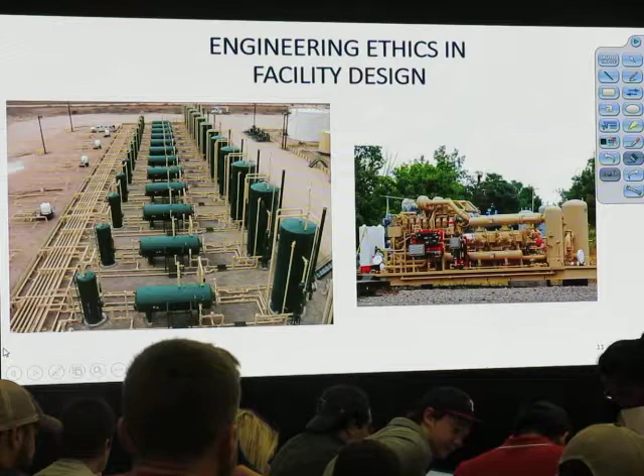This video will show here. We're going to talk about being a registered professional engineer. The film clip I'm going to show you is from 1937, and I hope the sound comes through.

Okay, so we had a glitch on the sound part. New London, Texas is located in Far East Texas. In 1937, a new school had been built. It had been in the East Texas oil field. They had a brand new building. The building exploded one Thursday afternoon. A few of the kids had got to go home earlier, but over 300 students and teachers and other people in that building were killed as a result of a natural gas explosion.

This film clip is a little grainy. Remember, it was shot in 1937. HD hadn't been invented yet. But it affected an entire community. It was as a result of this disaster that registered professional engineers were made - the ability to have registered professional engineers came into law by the Texas legislature.

So let me stop the video. Like I said, it's kind of grainy without the sound coming through there.

What they had done was the East Texas oil fields had just come into play. There was lots of natural gas. They built this new school building with the oil revenues. Things were really looking good. The school had been designed with a boiler system in place where you heat up water and then put hot water through the pipes. And the pipes were connected to radiant heaters in each of the classrooms.

Somebody decided on the school board that there was all that natural gas. Let's just use natural gas heaters. And we'll run a line from the oil fields, so they tapped a line - a company provided a line coming from the field separation, to run that gas into the school, and they put gas heaters in each classroom.

There was no engineering design on it. So the classrooms had this natural gas piping into every classroom. There were leaks in the building, but they weren't detected. Natural gas has no smell. When you say you smell gas, like in a municipal line, it's because mercaptans have been introduced into the line as a safety feature, so that you can smell that gas.

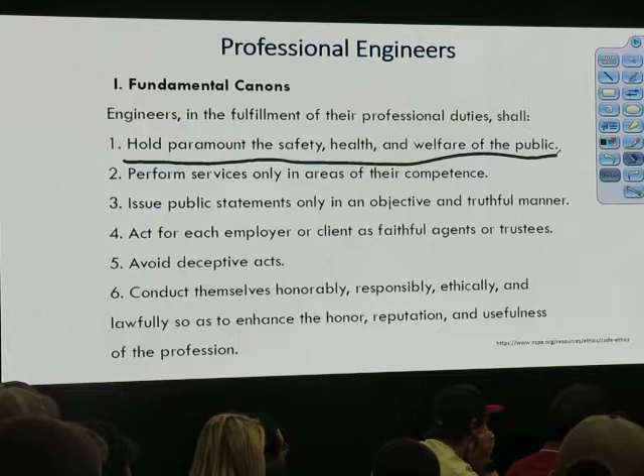And then these are in the rules of practice. Here's another one that's really key and important after safety, health, and welfare: engineers shall perform services only in their areas of competence. So you're trained as petroleum engineers, and especially when we talk about facilities design, there are lots of areas of that facility and things we'll build and talk about that we're not going to cover in petroleum engineering classes.

For example, electrical installation, structural requirements, civil works for roads and foundations—all of those are a separate discipline of engineering. If you want to take those, you take civil engineering, mechanical engineering. So there may be parts and pieces of that facility you're going to have to go somewhere else to get that technical skill, or have people with those technical skills perform those duties for you.

There are areas of competence that you will develop as you go through your career, and for certain things you'll have a good understanding, a good knowledge of that area, so it may not be necessary to bring in the mechanical engineer to verify that particular part if you feel you have that competence. But remember, by signing off on it, you're guaranteeing health and safety.

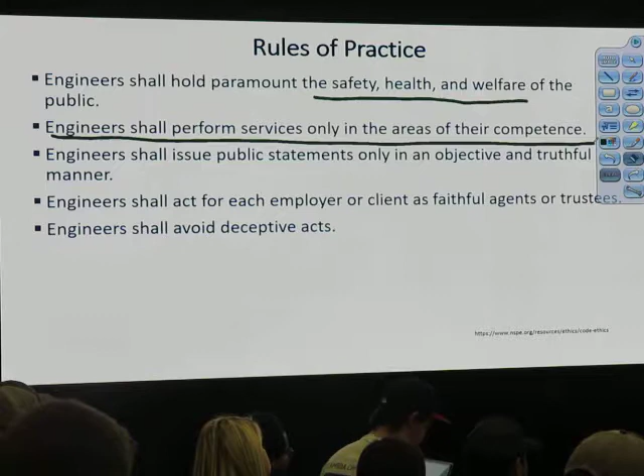These are the professional obligations. They look very similar to some of the codes and canons we've already talked about. But in summary, being an engineer, you have a responsibility to protect the safety and health of the public in the design and operation of a facility, whether you're licensed or not.

If you're licensed, that means you can represent yourself to the public, take on independent work, be a consultant, sign government documents, sign certified documents where necessary to be signed by a professional engineer. A lot of you will work in companies where that is not required—you work under what's called an industry exemption, where you're allowed to do the engineering work without being a professional engineer. The company takes that liability umbrella under its own venue, attesting that their engineers are doing this safely.

But if you're working for a company operating on BLM lands or state lands, where a state or federal government wants sign-off by a registered professional engineer, you have to be registered to do that.

So the public includes your coworkers and fellow employees, the people sitting with you here today, and some you haven't even met yet. Know what your limits are on your area of expertise when it comes to facility ethics. Questions?

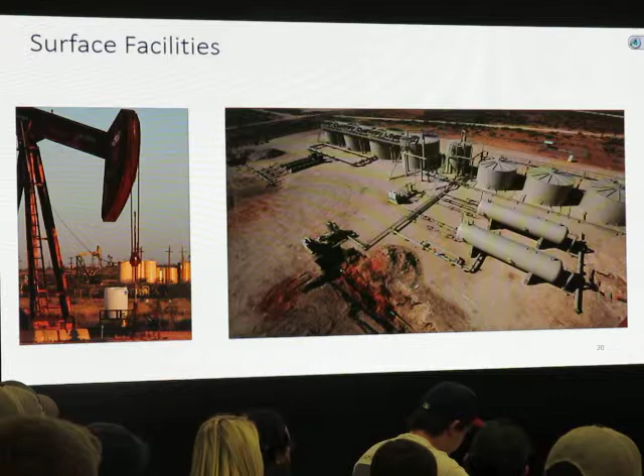Okay, I understand you went through some of these pretty quickly. On facilities, one thing I've noticed is that most of the time when we go through facilities, every one of them is sitting by a road. There's access to that by the public. So just because it's in the oil field, not everybody out there is an oil field worker.

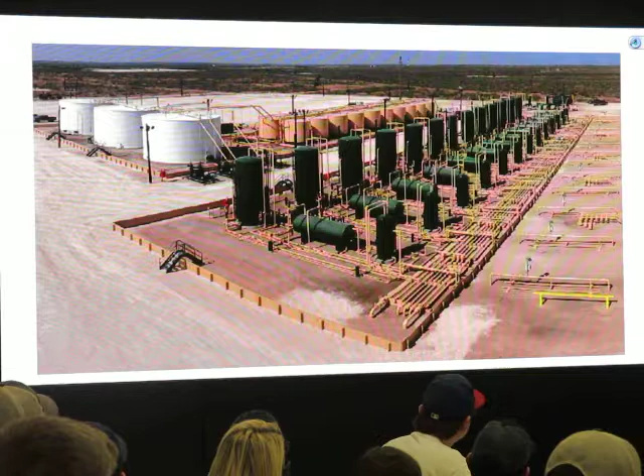There are hunters that will come out and be hunting. There are people who drive up and down the oil field roads for places to party, all those kinds of things. There are going to be lots of reasons that lots of people are out there—it could be a school bus dropping off kids for a tour. All of those things have to be designed with safety in mind.

We looked at some of those earlier slides with lots of batteries, lots of equipment, lots of facilities. A tank battery can be as simple as this. One thing that trips people up in senior design: you learn how to design all these vessels and think you have to use every one in your battery design. But a facility with a couple of oil tanks, a water tank, some separators, and a heater treater is all they needed at that particular battery to do the work. Don't over-engineer it. Don't put in more than you need. This was a simple battery, requiring very little equipment compared to some of the bigger ones we saw with lots of pictures.

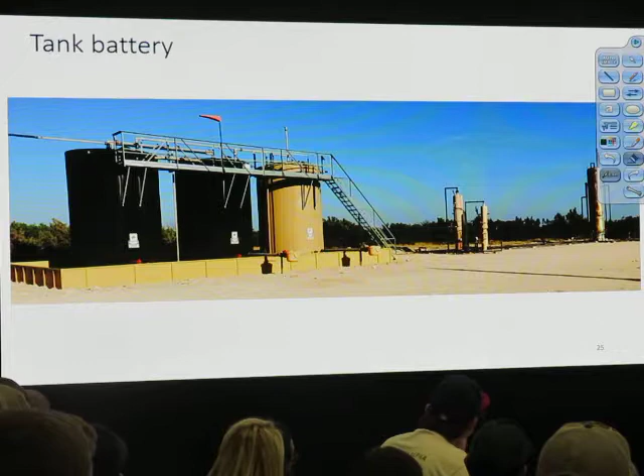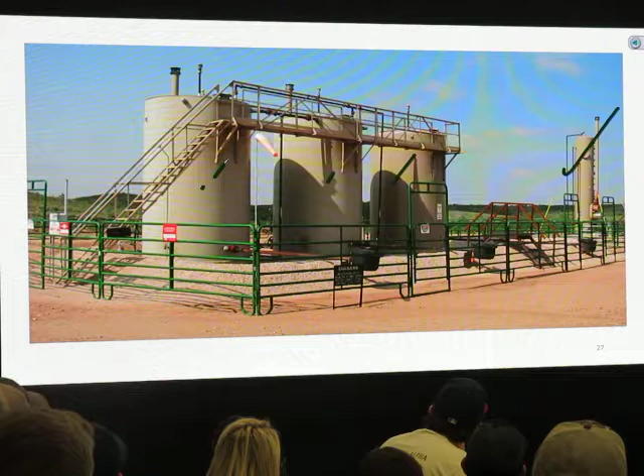Tanks. This is a tank battery. All it has is a heater treater and three tanks, probably two oil and one water. That can be a battery. It works as a facility.

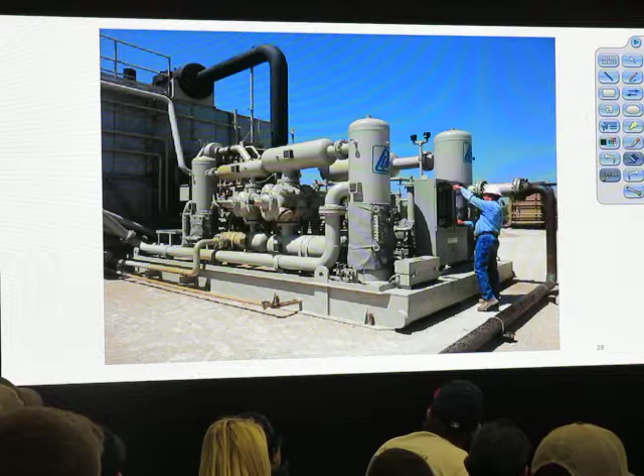Compression, we're going to talk about that. A lot of these things we will see live, or in work, or at OTC. We've added compressors that you guys haven't seen yet, some with internals and plexiglass plates over them so you can see those interior working parts.

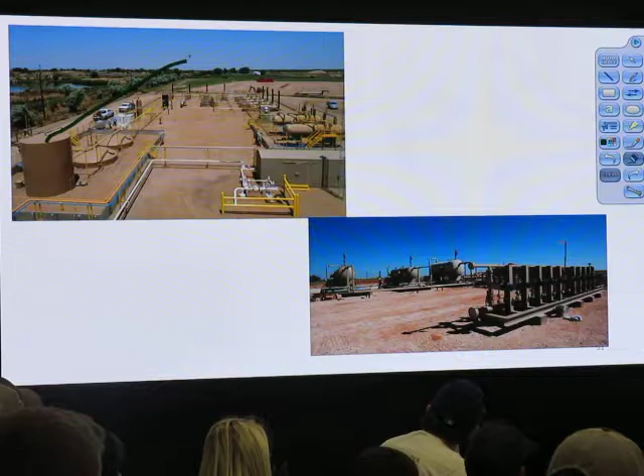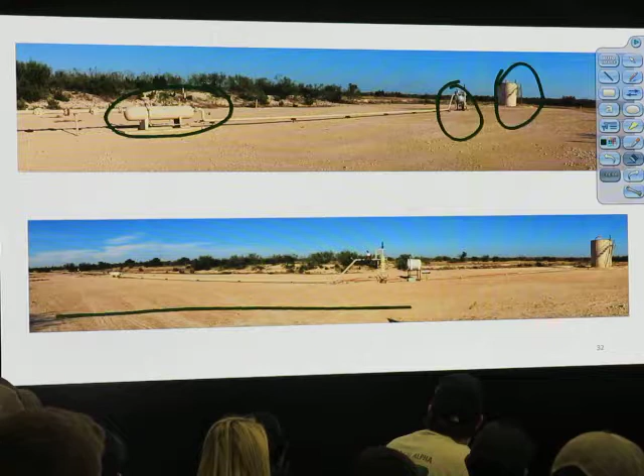This is a gas well, a high pressure gas well. It's got a wellhead here, a tank probably for water, and a separator. Here's another view going on down to a gas sales point—we're going to talk a lot about gas sales in a minute. Notice how simple that can be, and how far apart things are. It's probably at least 50 feet from this wellhead to that separator. There are minimum distances we need to space equipment for fire safety and explosion safety. What you'll see at OTC is condensed together because we're not putting anything hazardous through it, but in practice these things have to be safely spaced.

Either there will be a state or federal standard on that, or there will be a company policy on how far apart those vessels need to be. Sooner or later.

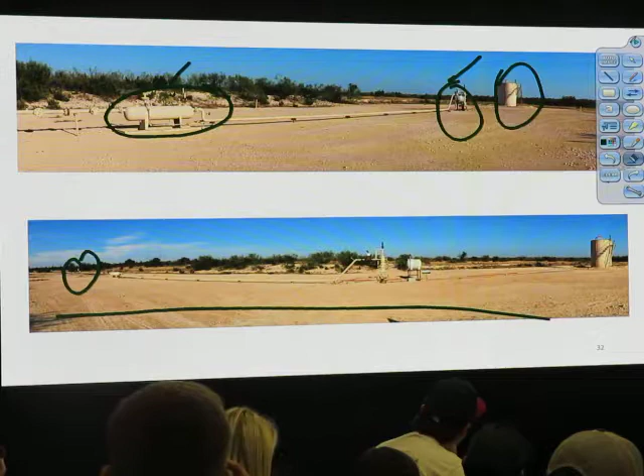Again, more samples of batteries. These are gas sales meters—this is where your cash register is for the sales of gas off any given lease or property. Notice there are two: one here, and another one here. Probably the gas company has a meter they use to collect volumes and sell the gas, and the company may have a check meter. You're the operator, you want to make sure they're not getting any mismeasurement, so you put your own meter in as a check meter to double check that volume, because this is what you're getting paid on.

The other important part to think about is the quality going through the sales line, and the pressure at these points on the battery. Wherever this goes into a sales line, there's a pressure behind it set by the gas processor or the gas pipeline company. That pressure is your starting point for your design through the battery, because everything we do—if the gas is flowing this way—has to be able to get into whatever that pressure is. That's our starting point, and we negotiate that as part of the contract. It may not be negotiable; there's only one gathering system in a given area. That pressure is set at that point, whether it's 50 psi or 1,000 psi.

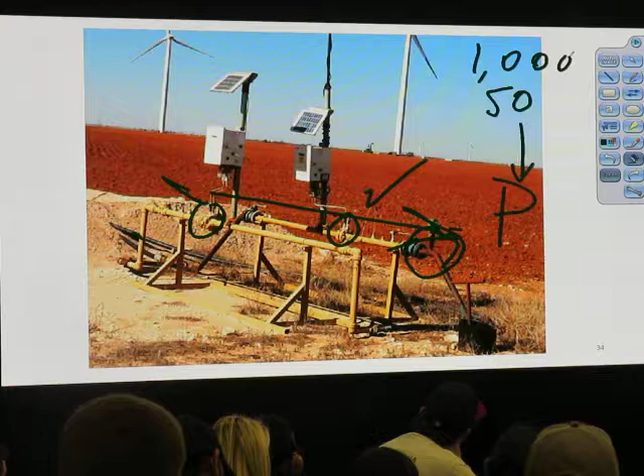That's going to be set in our contract, and everything we put in there has to be designed to meet that requirement. If we can't get into this line, we don't sell the gas. We don't sell the gas means we don't sell the oil, because we're shut in. So this is critical.

Again, a little review back maybe from what you covered earlier last week. Keep coming in here once a week, it's going to be a good deal. I won't know what you talked about.

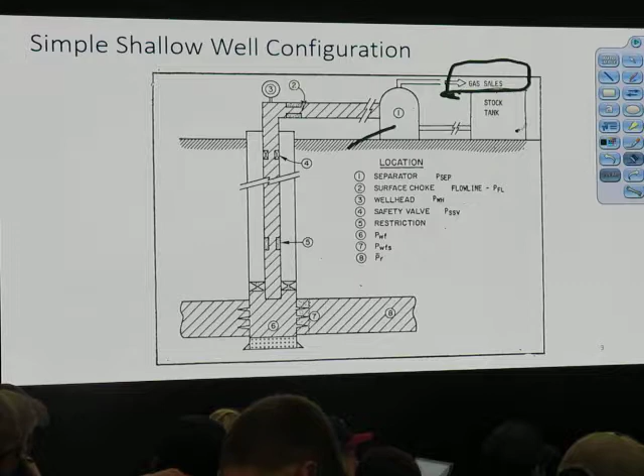Here's our gas sales coming through here, out in the simplest case through a separator and going to gas sales. That's the back pressure point—that's our sales point, that's our cash register. Just like off the oil tank, here's our oil sales. So this is where we're making our money, selling it here and selling it here. If the gas doesn't meet the minimum standards for quality or pressure, it doesn't move. Same with the oil.

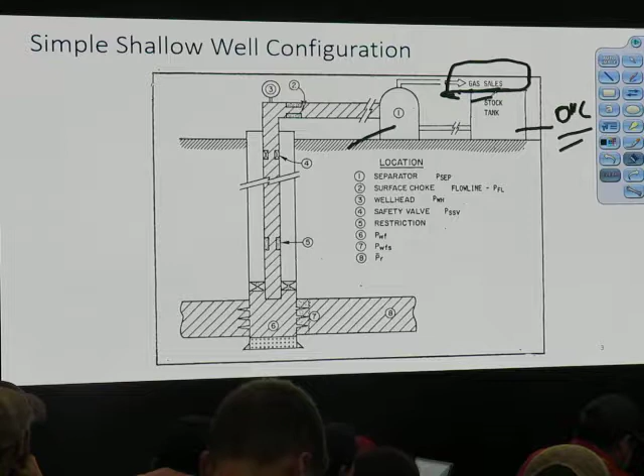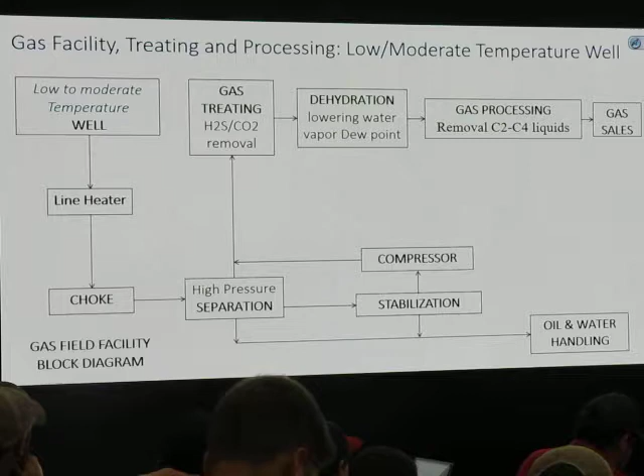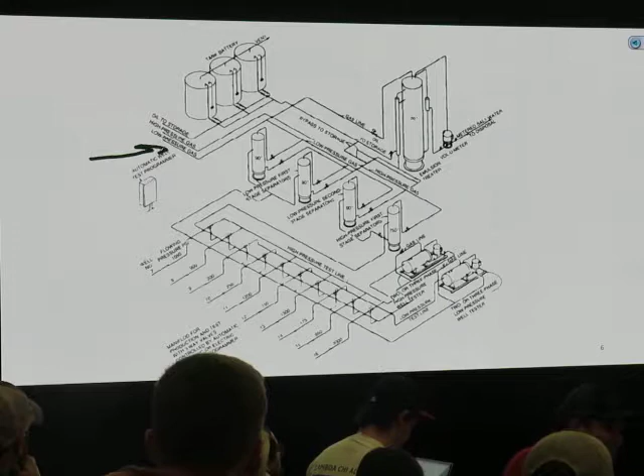You look a little bit at the flow streams for high temperature, low temperature wells. Some tank batteries will have a high-pressure gas system, and some will have a low-pressure system. This is not uncommon, especially on offshore platforms, also where you have a gas lift system where you're pressuring up some of the gas. If you look closer, it says low-pressure gas line, high-pressure gas line. The high-pressure gas line may be taken off going back for gas lift wells, or it may go for additional compression. The low-pressure gas is where we're selling it.

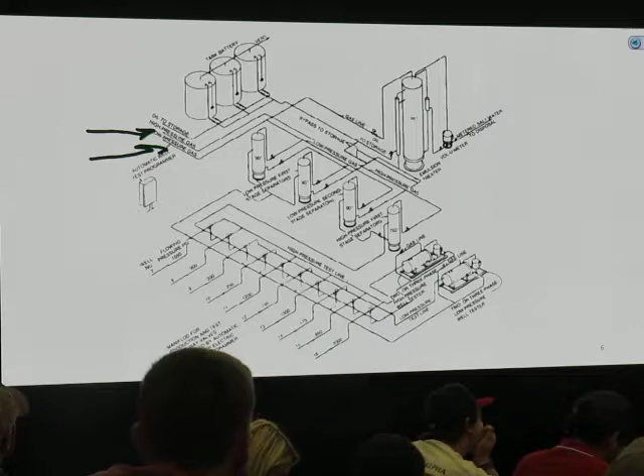What's high, what's low? Generally in an oil field gathering system where we have oil wells using pumping units producing to tank batteries, that line pressure is going to be on the order of 50 psi, certainly less than 100 usually. It's not uncommon in gas fields to have 500 to 1,000 psi line pressure that we have to meet. We may be able to meet that requirement just by the natural flowing pressure of the well, and then as the well depletes, we may have to add compression to get there. So those are the order of magnitude numbers you'll be looking at for pressure.

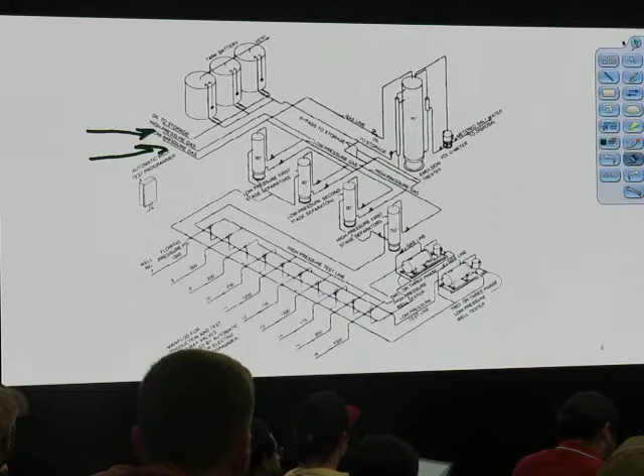Okay, slides with lots of words. Love all this.

A gas contract may have 20 pages to it, and a lot of that will be written by lawyers, hopefully with your help as an engineer. A lot of gas contracts are already boilerplated with set language agreed on by decisions in law over the years. There won't be much to change, but there will be things negotiable in every gas contract. Once you've signed that gas contract, that's what you're going to live with through the remaining life of that field.

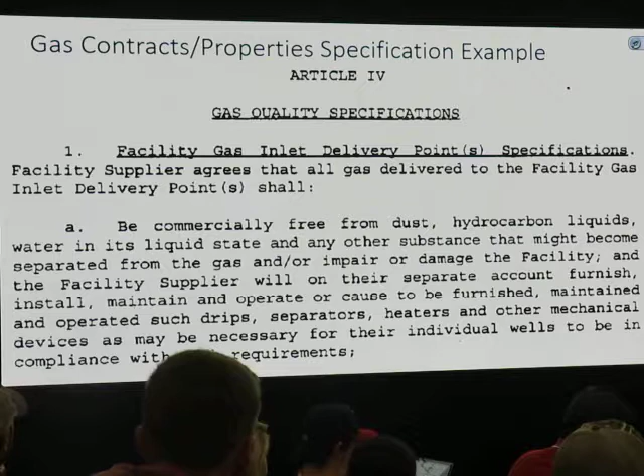So at the delivery points, that's where we're selling the gas. We'll have language in here: it's got to be free of dust, hydrocarbon liquids, water, and other contaminants that might have come through the system. Dust may sound strange, but you literally can get dusty gas. Not sure how that happens, but I've seen lots of dirt build up in some gas lines. Part of it is corrosion products probably that have made their way through the system to the metering points.

Why do we not want contaminants in the gas sales? It damages the line, and the company doesn't want to pay you for things they can't sell. What's the problem with H2S? It's corrosive, isn't it? Take H2S and some water, mix it together, you get sulfuric acid, and it'll eat away the metal. Same with CO2 - carbon dioxide forms carbonic acid, eats away at pipe and metal.

What's the other danger with hydrogen sulfide? Poisonous, yeah. Hydrogen sulfide is super dangerous. We'll look at some charts in a moment.

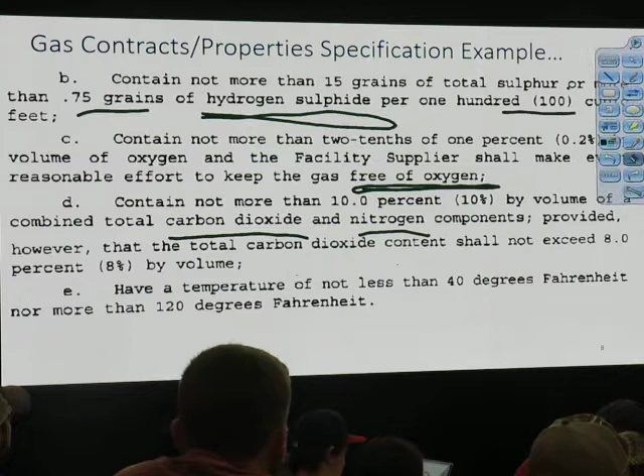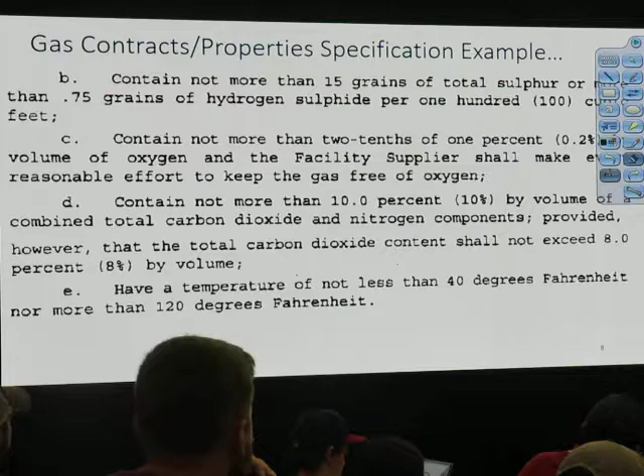Who gets rid of the H2S? Either we'll have to do it, or the purchaser will have to do it of the gas. Depends on how our contract's written. You might be able to sell it at the battery with H2S.

This is another pipeline spec. You wouldn't find all these in the same contract, but it talks about grains of total sulfur that can be there, the grains of H2S. This one doesn't allow more than 2% CO2. And then it says residue gas delivered at the pipeline, not more than a total of 3% by volume of all nonhydrocarbon gases. What is residue gas?

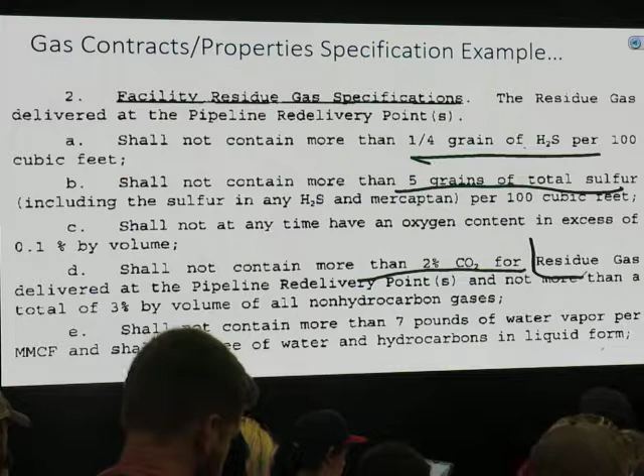You've probably heard of associated gas. Residue gas is what's left after processing. So that's generally what goes to sales at the tail of a plant, so we call it residue. The plant will separate out the NGLs, the natural gas liquids, separate out propane and butane, and then residue. Residue is very close to pure methane. So you'll see that term used a lot in the contracts.

Another point that's real critical is it shall not contain more than 7 pounds of water per million standard cubic feet. 7 pounds of water per million. Why is the water content important?

It can freeze, can it? And what else? It's one of those products that help make corrosion. It's going to be part of the corrosive chemical reaction. So we've got to keep the water out of it.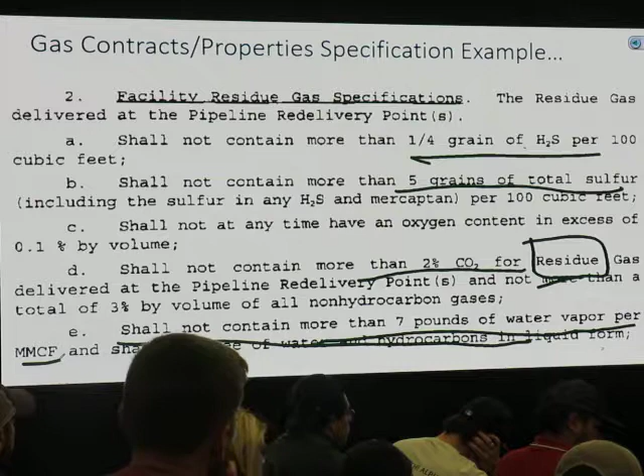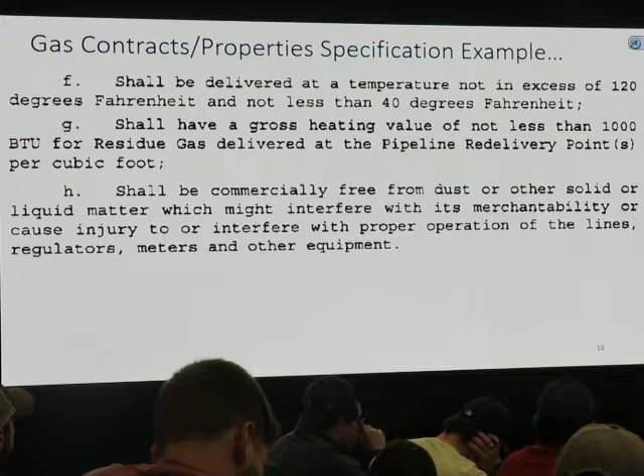Something can go wrong, usually will go wrong. You've got to have some way to negotiate how to correct that. That'll be in the gas contract.

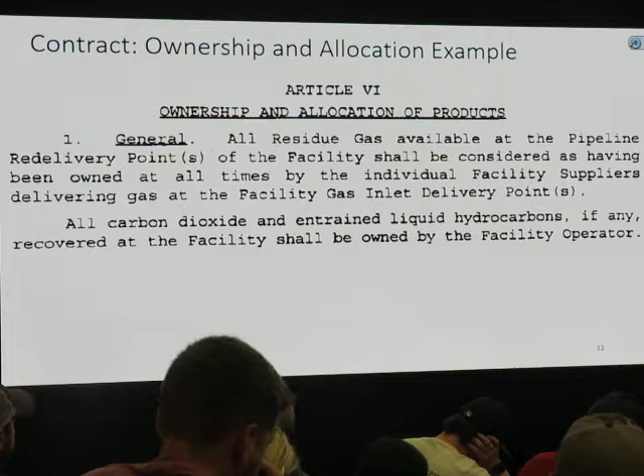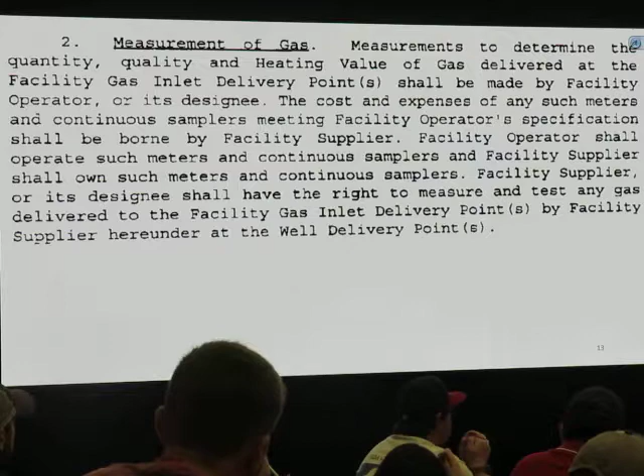The measurement of the gas is critical. It will be specified in the contract how the gas will be measured, what type of meters will be used, who will be responsible for calibrating them. There is an American Gas Association Report 3 that is kind of the Bible of gas measurement and how sale gases are determined.

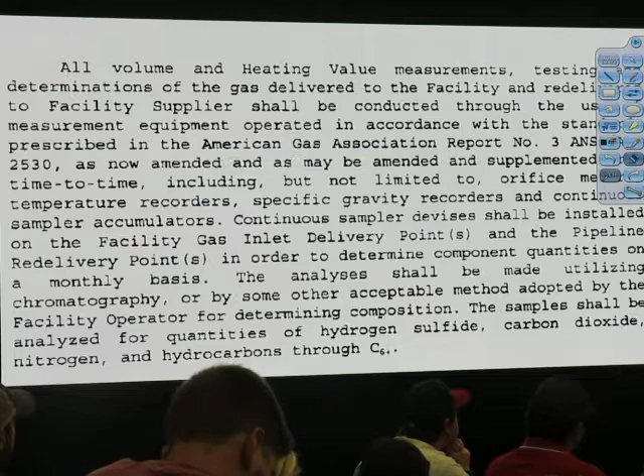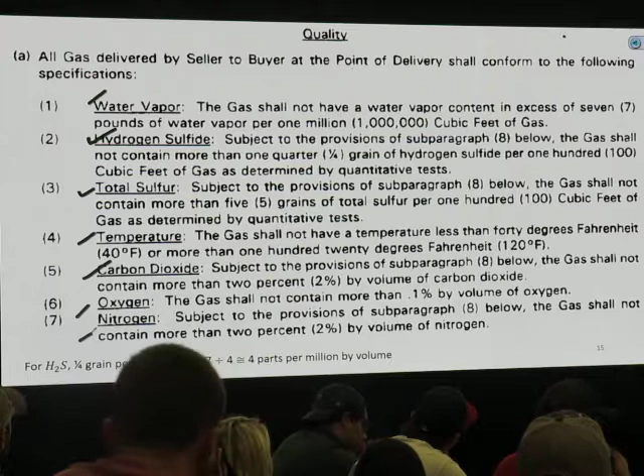Here's another way these elements could all be specified. This one's laid out kind of nice and neat and in tabular form. It talks about water vapor, hydrogen sulfide, total sulfur, temperature, carbon dioxide, oxygen, and nitrogen. That's laid out pretty handy for you.

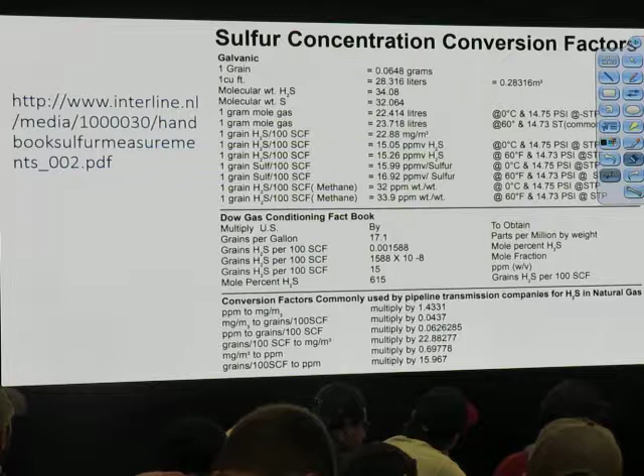These are conversion tables for all the ways H2S can be written, or in all the units of measurement, and how you can convert from one back to the other. Those will be important to you. H2S is dangerous.

The mercaptan that's put in there will smell similar to H2S, the rotten egg smell. But at 10 parts per million, you're safe for 8 hours of exposure. That's what OSHA says. You work in the oil field every day, you get that 10 parts per million, you go home, you reset, come back the next day. You may have a headache, might feel a little dizzy, but you're all right. Been there, done that.

At 100 parts per million, though, your olfactory nerves are dead. At that point, you think, I don't smell any H2S, it must be all right. That just means you're already past the 100 part per million threshold. Now you can't smell it anymore, you can't rely on your natural senses. That's why you'll wear H2S detectors on your clothing in the breathing space when you're working in the field that has H2S in it. And if you see a higher concentration, it can be lethal.

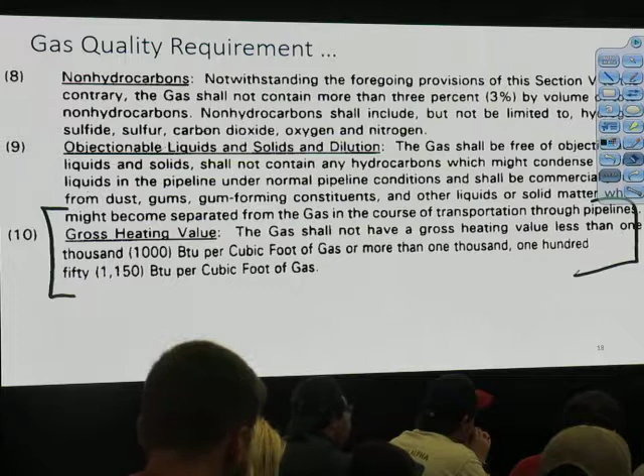This is an important contract spec here where we talk about gross heating values. Generally we want 1,000 BTU per cubic foot of gas. Remember I told you some areas had it higher, they would dilute that down where they could sell that total gas stream. So there will be a range specified in your contract that you'll have to have gas that will meet those qualities.

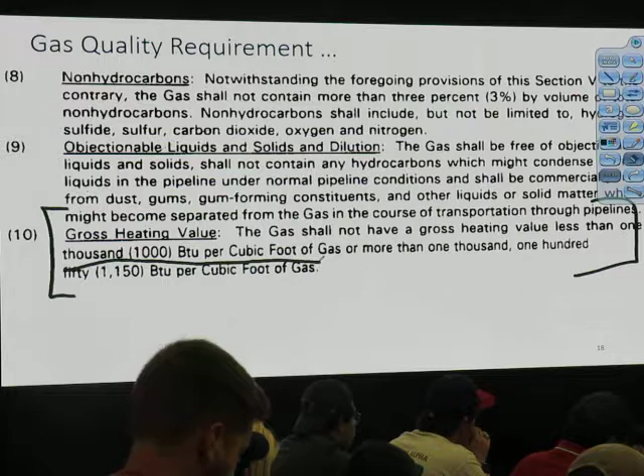And then the measurement and testing, we'll talk about different kinds of meters in here. There's certain kinds that can be used for gas measurement. Some are more accurate than others, and we'll discuss what usually happens when you get a more accurate meter.

I could get this meter, not as accurate. I can get this meter more accurate. What's the difference? Cost. So you got to have something that fits the economics of where you're at too. There's lots of things you can do, but you may not be able to take the cost of doing it.

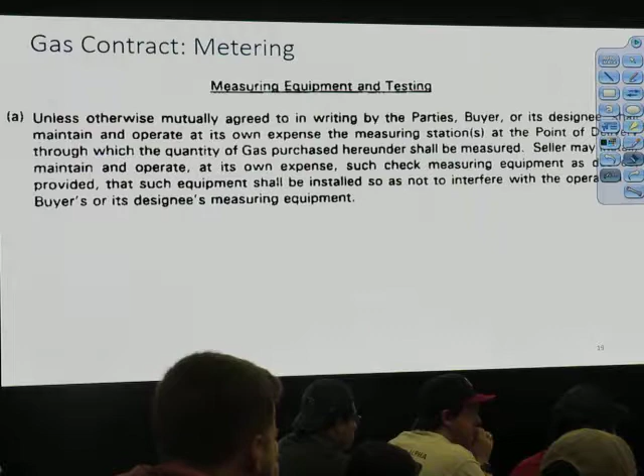This talks a little bit about the meters. More about the meters. Let's get to these questions.

Let's talk about revenue from a gas stream. This will be important to you here for the economics of what you're doing, also in your design projects that you'll be bringing this through. We'll have to have a gas analysis that determines the BTU per standard cubic feet.

There's only one way to capture that and get it. You can get it on automatic measurements, but the equipment is very costly to do that as opposed to taking samples.

It will have to be metered at a contractual sales point, and then there will be a percent or differential from a reference price. So if I'm saying I'm selling the gas right here, the cost may be based on a market in Oklahoma. I might have to take a deduct to that market because of transportation. So our price reference points are generally in the U.S.

At the Houston Ship Channel, Henry Hub in Louisiana, or Waha in West Texas. Waha, the gas goes generally on out to California to the population centers on the West Coast. Henry Hub can go to the mid-continent. And Houston Ship Channel usually has the pipelines that can take it all the way up the East Coast to New York City. Kind of counterintuitive, you already got Oklahoma going up, but a lot of those pipes, we'll see in a minute, run out of Houston.

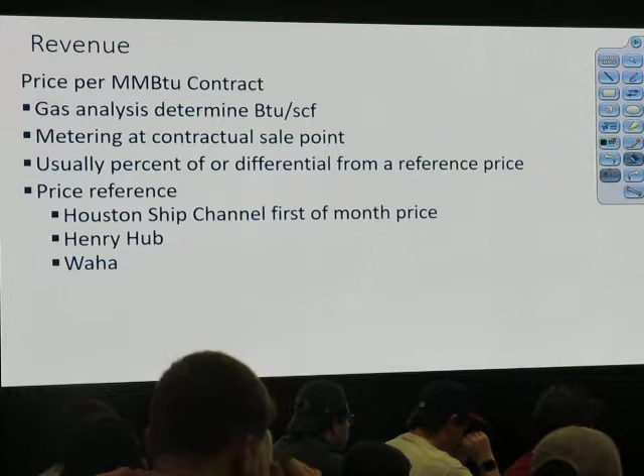So let's look at an example of how this would work on the calculation. We have 10 wells. We got 3 million a day per well, 8 barrels of oil per million cubic feet of gas. We've got a 1250 BTU, that's kind of a rich gas.

And then we've got a Henry Hub price of $8.53. That was taken a few years ago. Gas today is about $3.50. Same gas hit $15 in Chicago. But that didn't last long, and it was a pretty cold winter. Our oil price will take it $59.50.

And then as gas goes through pipelines and plants, there will be what's called shrinkage. And most of that is fuel gas used by compression or fuel gas to run treating equipment in the plant. And you're going to have to take that loss in your gas stream as part of your contract to move the gas. So we have a shrinkage on this one. We show a contract also that has gas price as Henry Hub less 15 cents per million BTU, not per MCF, but BTU. You gotta watch yourself switching back and forth. What's chargeable on a volumetric basis, what's chargeable on a heat content basis. And in our oil contract, we have a $2.50 charge on that, probably for transportation.

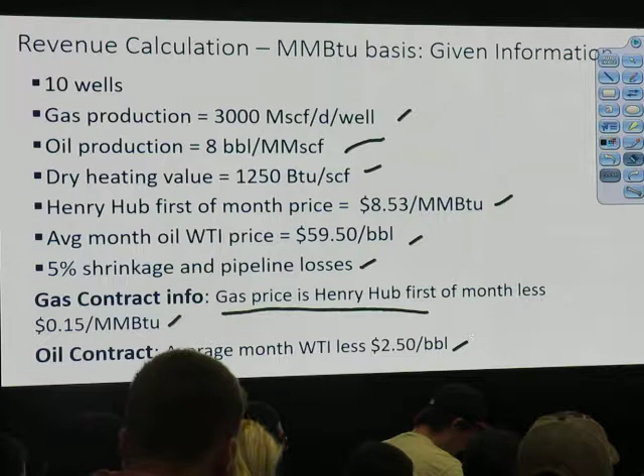So the gas revenue and the oil revenue are straightforward calculations. The gas revenue is our total gas stream, 10 wells times 0.95, that took care of shrinkage, times 1.25, that's our heat, times our number of MCF. And then we had a 15-cent deduction on our price per MMBtu. So this gives us this much per day in gas revenue. Straightforward calculation. What have we not accounted for in that calculation?

What assumption have we made? Price differential? No, we got the price differential. Difference between gross and net. What's our royalty on this? Okay, we can only do this to our share of the stream. We may do it to 100% of the stream, and we have to pay royalty out of this. So there's no royalty taken out of this. This is showing only the prices that affect that cubic foot of gas coming out of the ground.

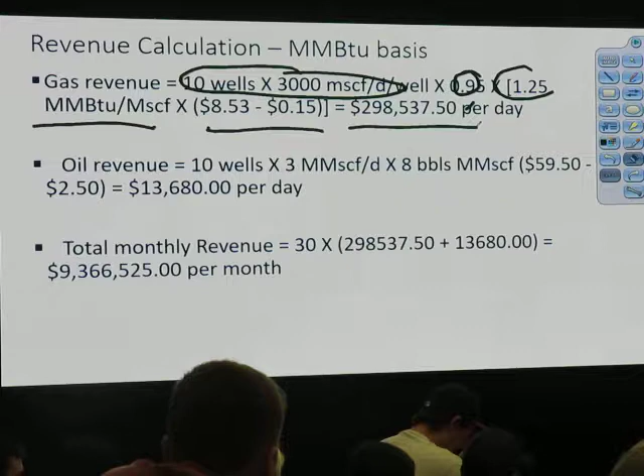Oil revenue the same way. This is the total volume. This is a ratio measured based on testing that's done, 8 barrels per million. Here's our deduct on our quoted price. Gives us that much revenue per day. Total monthly revenue, everything's done on a daily volume, so we add our gas and our oil together, times an average 30 days a month, and we've got that much revenue per month to work with. Straightforward?

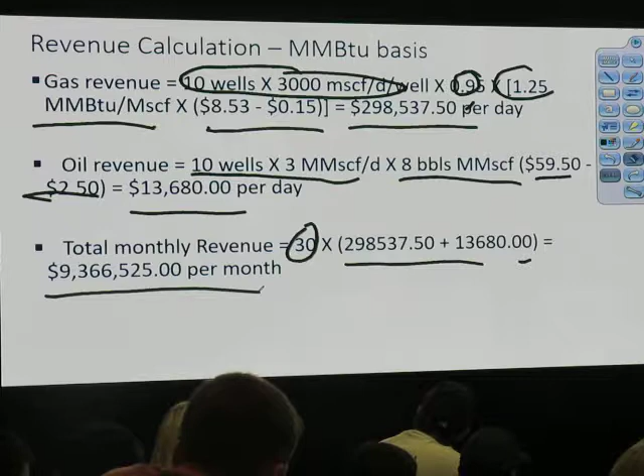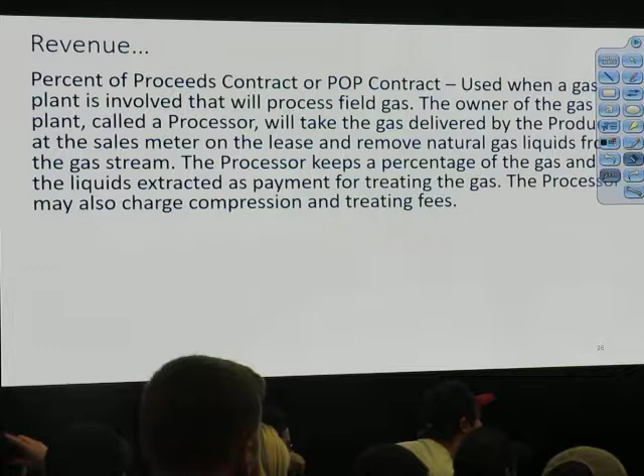That's the gas that comes out the tail end of the plant after it's been processed. They're going to keep 10 to 20% of that as a fee for bringing the gas through. On average, they'll take about 50% of the propane and butane they extract from the plant, and keep about half the revenue or less from the NGLs or gasoline extracted. That 1250 BTU gas we put in there probably has some gasoline component that could be pretty readily pulled out.

So the richer the gas, the more the plant has to process. These are order of magnitude numbers you'll see with a percent of proceeds. So if somebody tells you they got an 80-20 pop, what would that mean? They get 20% of it. You keep 80, they keep 20.

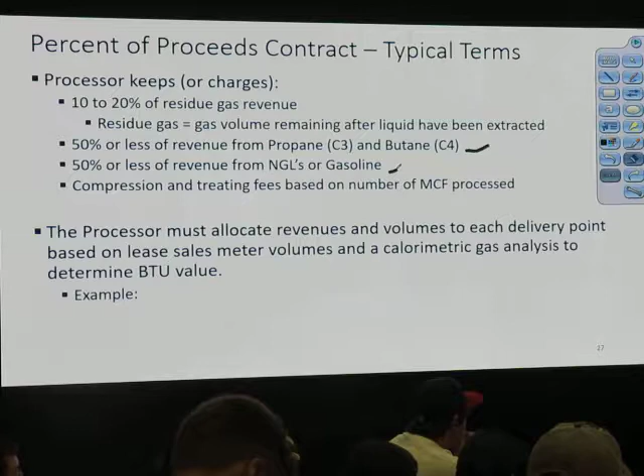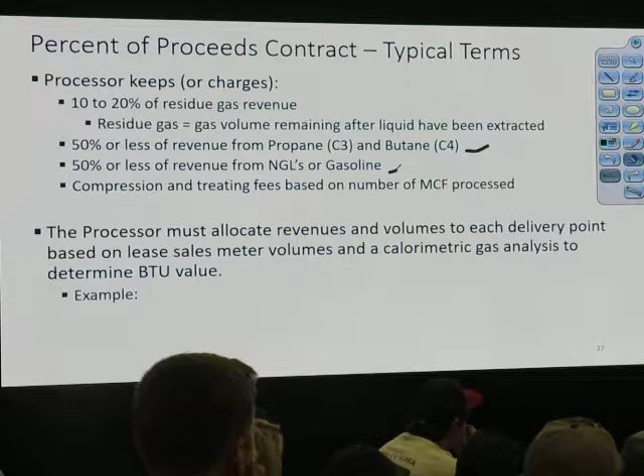So here's 3 producers, A, B, and C. Each one has a different flow rate. This one's got 1 million a day with a BTU value of this. Here's 500,000 a day with 1,000 BTUs. And here's 1.5 million a day with 900 BTU.

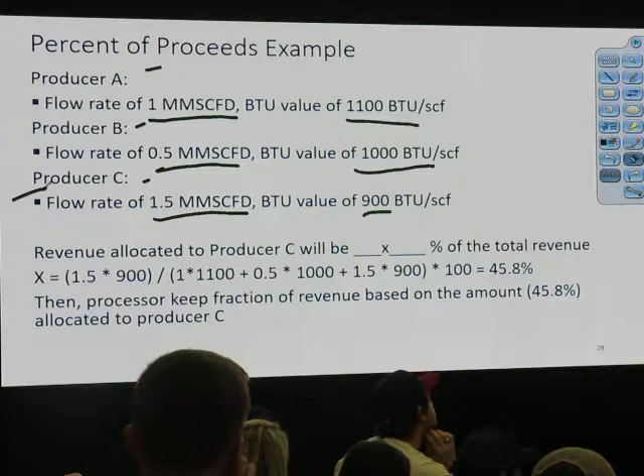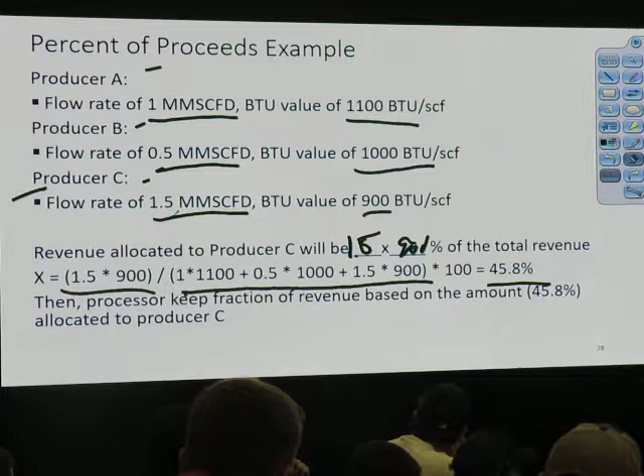So now we calculate a weighted revenue to be allocated. For producer C, as an example, he's got 1.5 times 900. That'll be his percent of the total weighting of all 3 combined. Got it? So this producer with 1.5 million a day at 900 BTU per standard cubic foot will get 45.8% of the revenue generated, allocated back to him based on his volume and heat value of his gas.

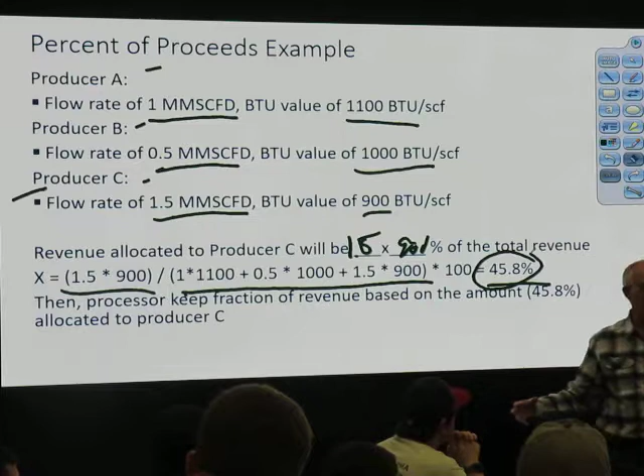And it gets to be very complex in the field. All those allocations have to be made. These 4 producers may be selling at one point, the next 2 rows may be selling at another point. So then they've got to allocate it back to those points and then in turn to the individual producers.

So, John, does it change throughout, or is it usually constant? Usually it'll stay constant. You want to check it if you do a workover, or if you recomplete to a different zone. But those tests may be taken every 6 months.

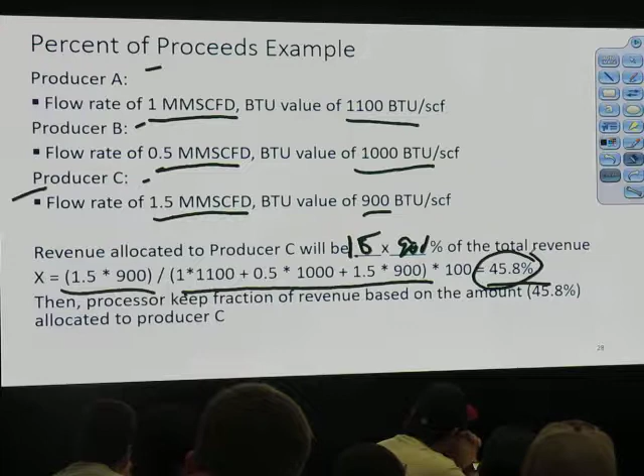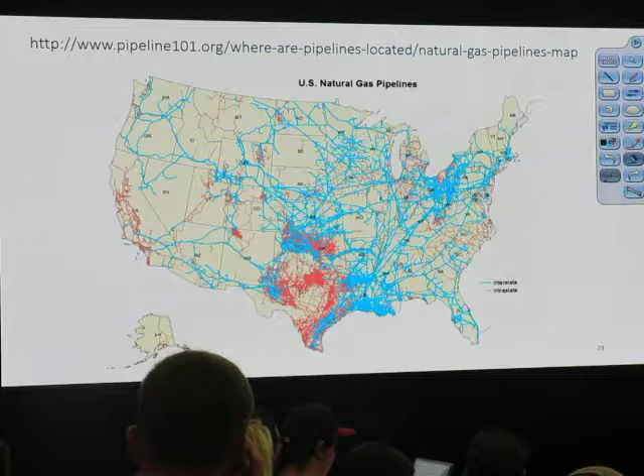Look at the collection of pipe now in the Marcellus as a result of shale gas. So they have more pipelines now closer to where these big markets are. The only trouble is they're getting a lot of environmental pushback on land pipelines. So there's still a dependency on gas coming out of here. You've got to know where your market is, where you can sell it. You can get into swaps and trades - sell your gas here, sell it to a company that'll move it up somewhere else so you make more money.

And then we're going to talk about hydrates.